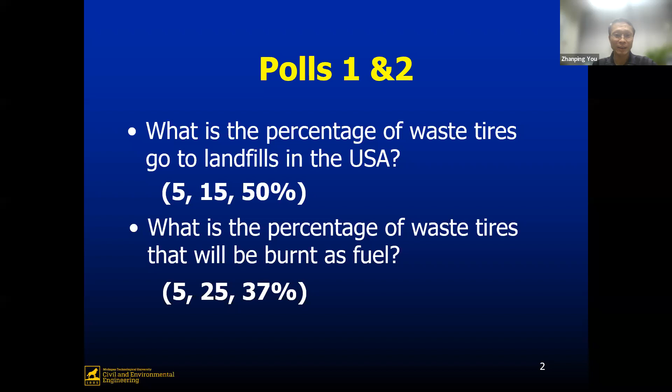Let's move to our second one, and I'm going to introduce what's the number in my mind. The next question is about waste tire as a fuel: what is the percentage of waste tires that get burned as fuel? The answer choices are 5%, 25%, and 37%. The poll is out, so feel free to pick one.

Sue should be launching a second poll if she has it. Meanwhile, you can think in your head what the answer is—what percent, this is all around the world. Wait, is this still in the USA? Yes, in USA, yeah, I did not write that one. Are you launching the poll, or is Sue? I think Sue is. Okay, it was up, but for some reason things did not work—let me try it again. Okay, sure.

I'm going to take my guess here. I'll guess 5%, because I hope people aren't burning tires. Oh, here we go, we get a chance to. So this was the first poll. Oh, the second one doesn't want to launch. All right, we're giving up on the second poll. Okay, you can basically take my guess. My guess is 5%. Well, I think it's bigger than 5%, but do you think we can go to about 37%? Really? Oh my gosh. I don't know, I ask.

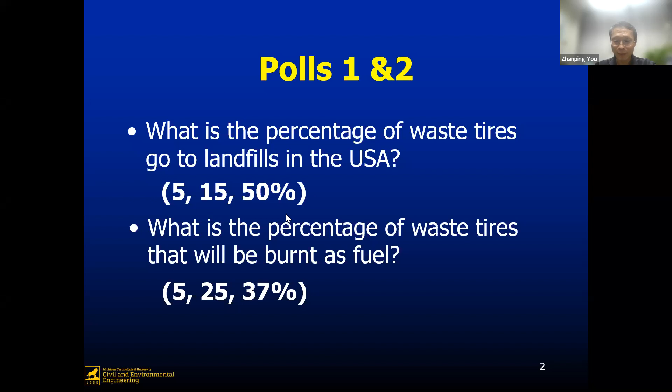Let's take a look, I have an official answer here. My answer comes from 2020 data from the U.S. Tire Manufacturers Association. On the left-hand side, these are all the tires we generate each year, about 4.5 million tons a year. You can see tire-derived fuel is about 37% — that's tires being burned as fuel.

Land disposed is about 15%. It's not like 50% because it's pretty much illegal to dump those things in the garbage, at least not in Houghton. You just cannot put it in the garbage — you have to pay, I think $5 a piece, so that you can recycle it. But my point here is land disposed and tire-derived fuel together, that's already 50%.

There are some other applications too, for example ground rubber, and in total about 4% of tire rubber is used in asphalt. It's very, very small — only about 4.2%. I'd like to see this number increase dramatically, even if not 40%, but much bigger, because that is more valuable in my opinion. So next, I'm going to show you why I think that way.

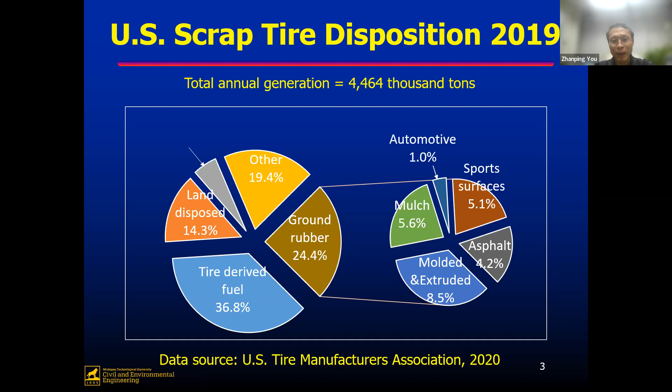Today I'm going to talk about using tire rubber to build roads. First I'll talk about field experiments and applications. Then we'll discuss some laboratory research work and modeling efforts. Then we'll cover education, workforce development, and some of the recognitions we received because of our projects, and briefly I'll provide some closing comments.

Next I'll talk about some typical road structures. Every different road has a different structure. Take US 41 in Baraga County — one of my projects is there. You have subgrade, on top subbase which is aggregates, then on top 6 inches of another type of aggregate, then 3 new layers of asphalt.

This project is basically what we call reconstruction, so everything is pretty new: asphalt base 3-inch, leveling asphalt 2-inch, and on top a 1.5-inch asphalt layer. That's the structure we have in US 41. But for other major highways with heavy traffic volume, the thickness is probably much thicker.

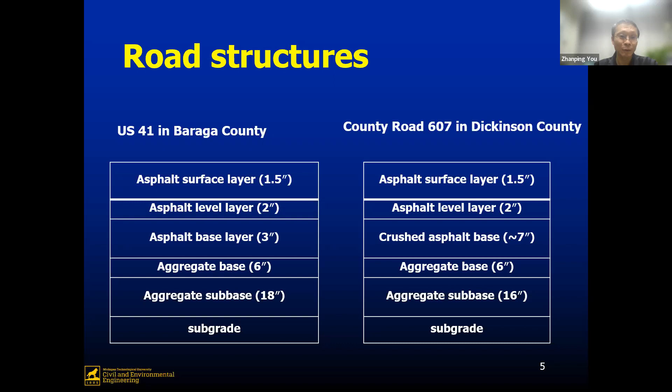That's because, price-wise, it's kind of expensive compared to other structures. The asphalt layer is the most expensive part. For a given project, the cost could be 70% of the materials cost or even more. That's basically the general information about typical road structures.

My next introduction will be how we recycle tires. Right now we get a lot of old tires. This is a facility I visited. On the left-hand side, you can see a fellow rolling those old tires and trying to shred them.

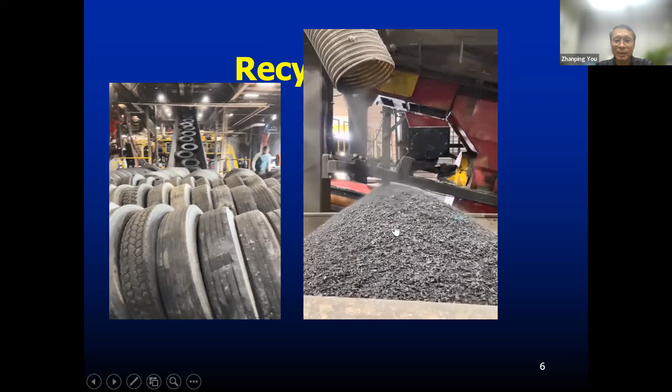Over here, they shred it into small pieces, and we process those pieces into finer materials to use. Eventually, this type of size is very coarse, as you can see here, and our material is even smaller. So the processing has a couple of stages.

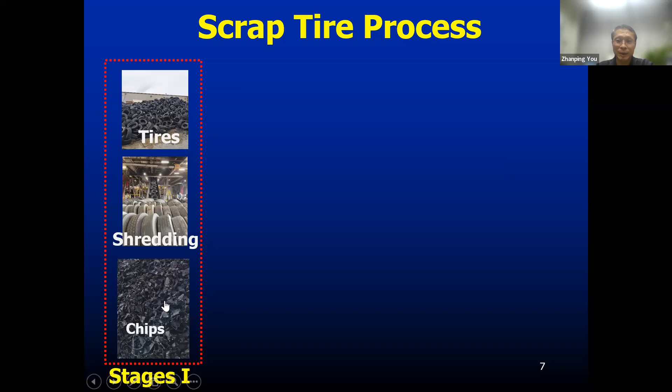First, the tire is shredded and becomes chips. Then we process it to get rid of the metals, because tires contain a lot of steel. We need to extract those metals because in asphalt road we don't want metals there—especially in Houghton, where we use a lot of salt. When salt reacts with steel, what happens? You get brown roads or something like that, which isn't really good.

So the next step we call stage 2. We granulate the chips again and again, and also remove the fibers, because there are a lot of nylon fibers inside. Those fibers aren't really compatible with the rubber—we don't really use the fiber, even though we have a research project recently starting to deal with those fibers. And then, of course, we get all those materials ready.

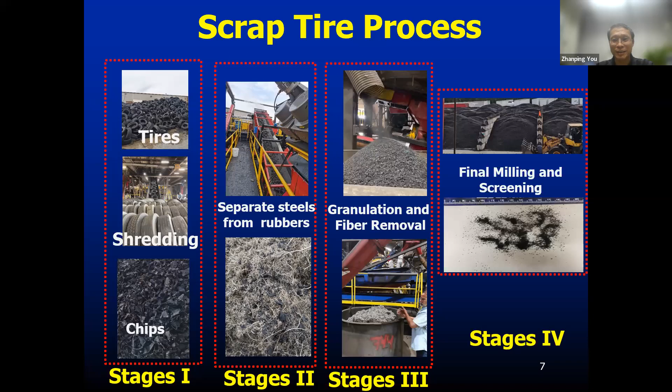You can see in the corner picture here, basically showing the fine particles. Those particles are normally around mesh 30 in size, and those are good for asphalt applications. So that's a quick introduction to how we recycle tires.

Next, we are going to put the rubber from tires into the roads. My first experiment was in 2015. We did some work at home—this is a road near us, only about 10 or 15 miles from campus. You can see this is in Keweenaw County.

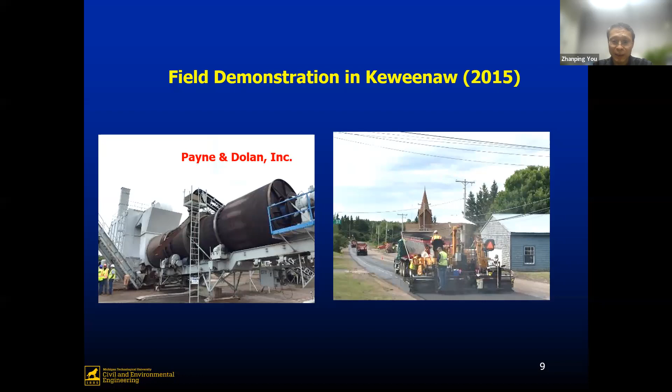The plant on the left-hand side is the Payne & Dolan plant in Hancock, and on the right-hand side is the road called Gay Mohawk Road, which connects with US 41. This road was taken as our experiment road, but it's a county road.

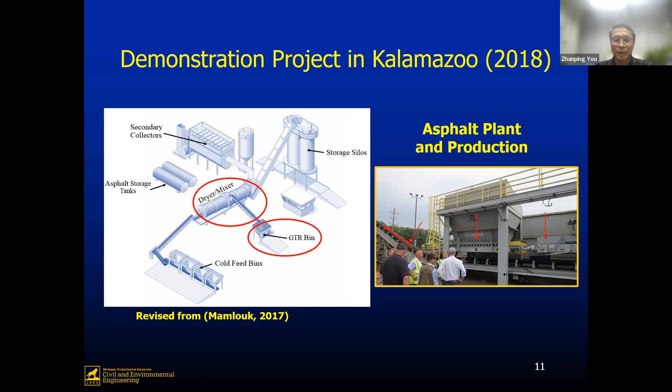All right, next one, I'm going to show you what the final product looks like. Here, basically, you can see this is the final product, being loaded up and then fed into a paver, and the paver is going to level it off.

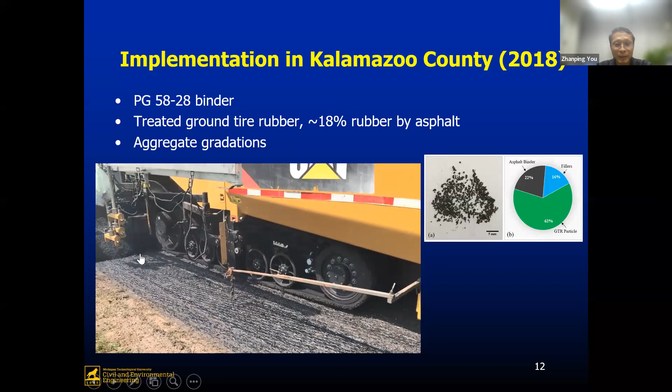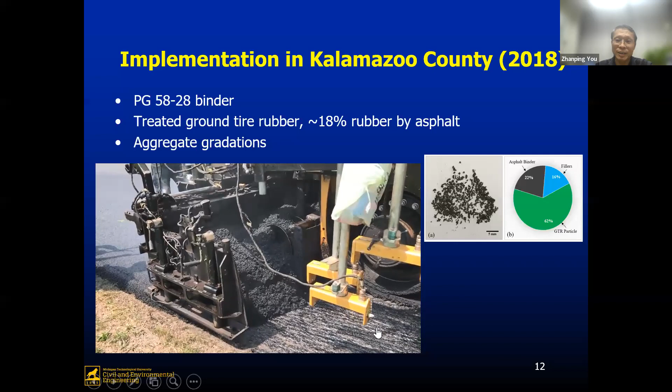Before that, of course, the road is being milled because we don't want to add more elevation. So basically, we want to put about 1.5 inch of asphalt surface. So we remove about 1.5 inch from the existing road because the existing road gets a lot of cracks, a lot of issues. We remove that section, we recycle those asphalt. Eventually, with the rubber, with new asphalt together, we come back to the roads.

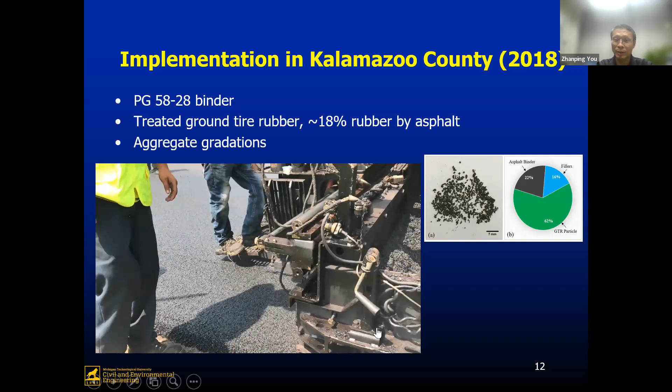So here is basically this asphalt. There's a lot of rubber inside. This is the highest rubber content we have played with in our research, about 18%. All right, so basically this is a lot. All right, let's move on.

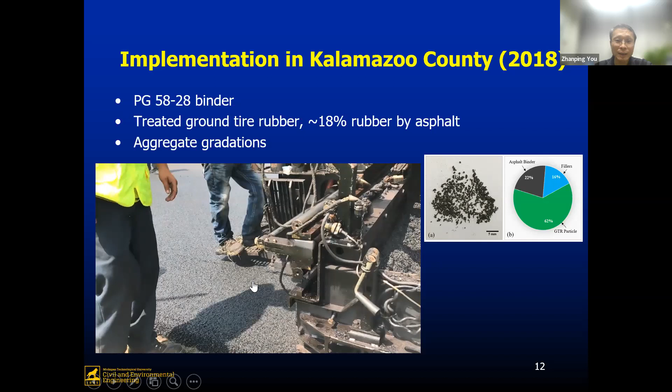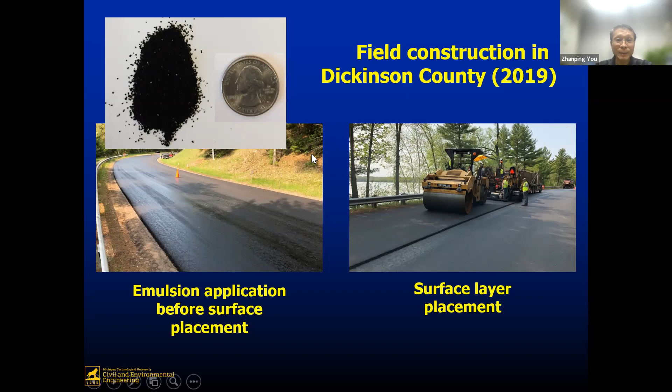And so basically the road is performing really well after 3 winters. So this is basically the project in Dickinson County.

I'm going to show you one exciting project that happened last year. This project is basically in Kent County near Grand Rapids. So basically this road, you can see this is a pre-existing condition. After we closed traffic, because this road is going to be repaired, we took this picture. You can see there are a lot of cracks and a lot of really, potholes also.

So this road, of course, has really heavy traffic. So basically what we did was use rubber asphalt. We only did basically this overlay, similar thing. We milled off about 2 inch on the top layer, and then we just paved another 2 inch back. Of course, compacted it, made sure things were going well, so the density is reaching the desired level we'd like to see.

So basically you can see this is 5 lanes, right? After the 5 lanes are done, you can see we have 3 lanes here basically with rubber asphalt. We also had 2 lanes for polymer sections, meaning polymer asphalt. Polymer asphalt in general is a material called SBS type polymer, which is more expensive than rubber. So in this project, we are trying to see if we can compare rubber versus polymer, if rubber materials can perform well with lower cost, so why not just promote use of more rubber instead of polymer? Normally we don't really use polymer unless it's really heavy traffic or special cases, because polymer asphalt is quite expensive.

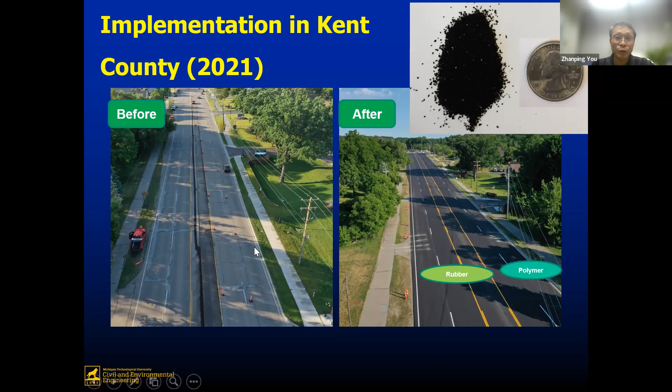All right, so I'm going to have one more poll here: what is the average daily traffic in the Kent County project I just showed you a minute ago? So basically for this one, what's the traffic volume? You can imagine, there are three choices. The first choice is 5,500 items of traffic per day, so that would be cars, trucks, everything. The second choice is about double that, 10,500. And then the third choice is 16,500.

And looks like people are choosing B, which is 10,500. Of course, we have no idea really.

There were two lanes of traffic. Or you're counting both ways, right? Like that has to be all the ways. About out and back? Yes. Okay, because that's basically applied on the same road. True, it's once out on one road and once back on the other road. Yeah, the 5 lanes, the outer 2 lanes are used often, the center lane normally for turning.

All right, looks like the majority, 61%, believe the answer is 10,500. Well, really my answer here is basically what we counted, and also according to the prediction, and of course the county did a really good job. They counted 16,500. So amazing, it's really a high traffic area. That's the reason we spent quite some effort and did a lot of testing on this road before we placed the material. We spent quite some time observing the materials design, and spent quite some time during the construction, and a lot of testing post-construction. So the really high traffic volume, 16,500, and there's a pretty significant amount of truck traffic, because this road basically goes to the interstate highways.

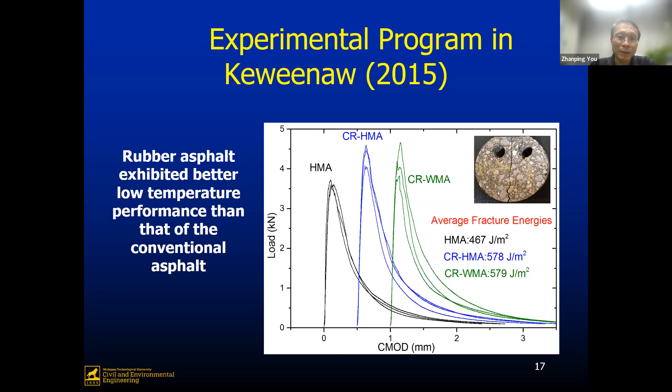The more fascinating thing is my next picture. This is a project in Kalamazoo County. Remember, this one had 18% rubber in the asphalt, which is really high concentration. The green colors are the fracture energy for our designs.

The first two bars are conventional asphalt. The conventional asphalt, for example, the fracture energy is only about 400.

But in our new design, we average about 1,200 or so. So basically, we can easily make that about 3 times higher than the conventional asphalt.

So this is really good. This means the material is going to be really tough, basically anti-crack. So I don't expect too much fatigue cracking, or maybe low temperature cracking.

So that was at about room temperature, right? No, this is minus 24 degrees. Sorry for that, minus 24. That's impressive. Yeah, because low temperature cracking basically happens in really freezing temperatures.

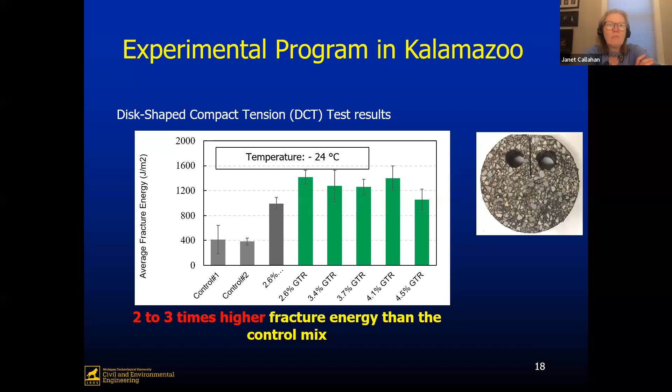In summertime, for example, you really don't see much cracking, but in wintertime it happens very often. That's the reason we test at really freezing temperatures. Very good question. Yeah, this is minus.

Another type of application we did with rubber is called chip seal. My very first chip seal attempt was in 2018. You can see in Kalamazoo here we have a special distributor truck. This distributor truck has the heating element and agitation inside.

Normally you just have emulsions, but for our research we have hot asphalt here. We have rubber being introduced through the auger to this truck, with a certain amount—as I mentioned, it was a really high percentage.

Then we blend it, agitate with high temperature, so that the asphalt and the rubber can work together and make a really uniform structure.

With that, we distributed that hot asphalt to the road, which you can see here on the left-hand side—that's after the distribution of asphalt. Normally for this one, we use about a half gallon per square yard. That's pretty significant.

So with that much asphalt and with a lot of rubber inside, on top we apply chips, which are small stones, and compact it. That's basically how you make a new road. This road, of course, is low cost, but potentially can have very good longevity because of the rubber application.

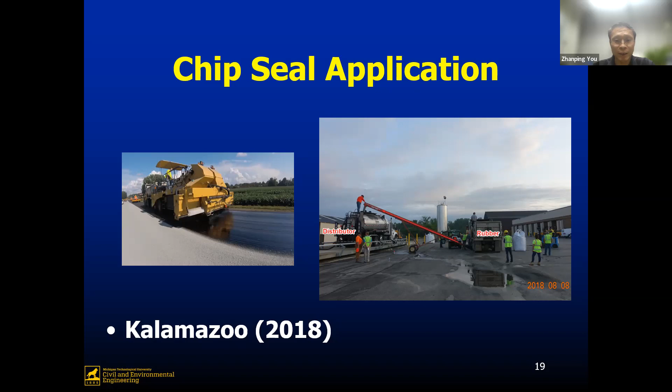Next I'll show you that last year we did a different chip seal process. This chip seal also uses hot rubber, but we are not introducing it to this truck.

You see this truck—the asphalt liquid is coming from the plant. We basically produce this in the plant.

You can see on the corner here, this is a yard. We process the rubber, and the rubber meets with asphalt, then we let it cure, and then put that in the distributor truck and send it to the road.

So this is how they spray hot asphalt on the road—about more than half a gallon per square yard is applied.

You can see the existing road condition is pretty bad, a lot of cracks. But this is basically how we are doing this type of project.

And you can see this one actually is not smoke. All right, this is not smoke. You don't really smell too much, really. This is really steam because the road structure is kind of cooler, and the asphalt that comes out is pretty hot. So when they meet together, it generates a lot of water vapor.

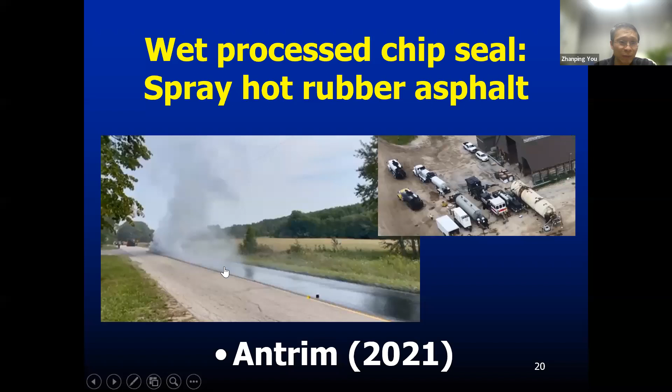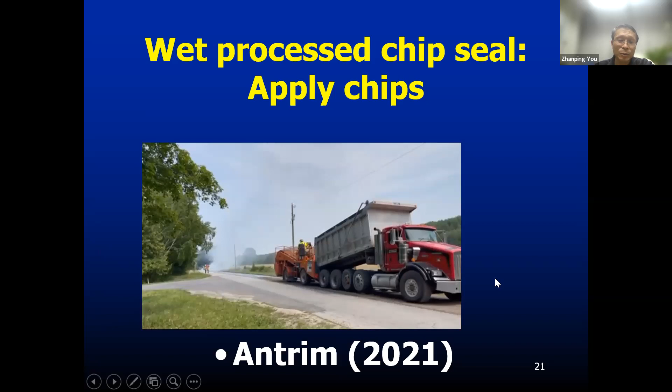My next slide is basically showing you after the spraying, right? So this is the hot rubber being applied on roads. We are applying chips on top, and after the chips are ready, we compact it to make a new road. So as I said, this is really a low cost way to maintain an existing road.

I'm going to briefly talk about some of the models we have, because I know most of the time you'd like to see what the university is doing, like doing the lab work. Of course, we always do lab work, and we also like to see applications. Sometimes computer models are something very unique, and there's a lot of insight we can get.

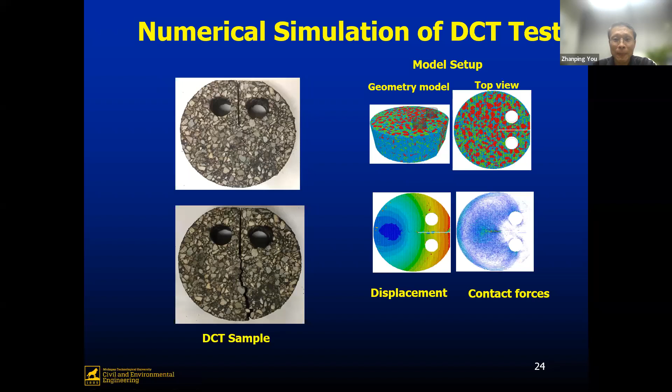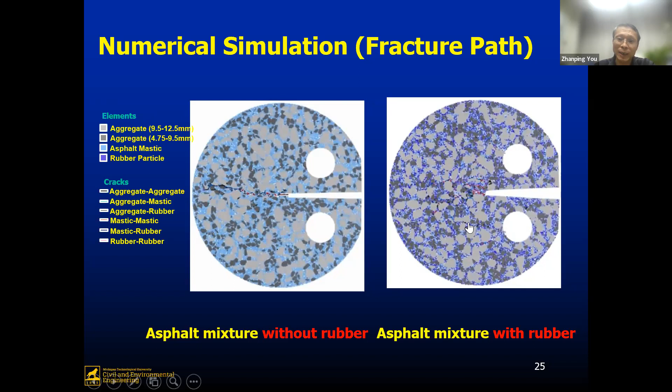I'm going to show you, for example, on the picture here, one sample has rubber, the other no rubber. With no rubber, the asphalt sample can only go through a certain amount of displacement before it cracks quickly. On the right hand side, you can see the red color things moving forward - those are cracks. This sample allows much more displacement until it's cracked, basically the failure. So that means there are some unique advantages when asphalt is introduced with some rubber. The one on the right is the better one to use with rubber.

So I'm going to show you the next picture, which shows the contact force chains. I'm going to click this one - you can see during the simulation, I took it out because all the images gathered together are kind of hard to read, so I only separated all the contact force chains to show.

You can see this one - remember the crack really happening, and the contact force continues to move towards the left, so it cracks the sample really quickly, concentrating the force. But on the right hand side, because of the rubber, you can see the force has been redistributed to different locations, which means the sample will survive much better. So that's the difference between even the same structure, exact same structure - the only difference here is the introduction of new rubber materials inside.

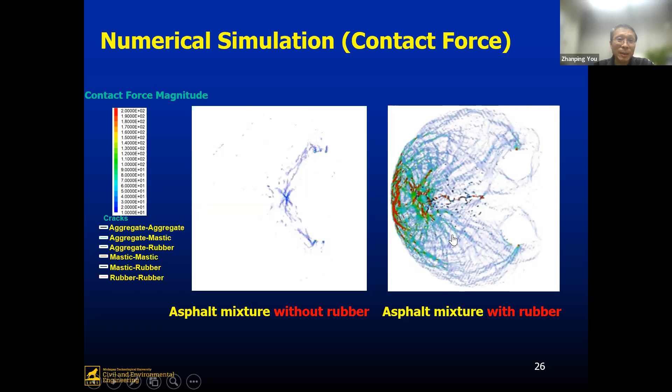I'm going to introduce my assistant Kobe. Kobe has been here with me over two years, and he has helped me do quite a bit of research projects. So Kobe, are you ready?

Yes, I'm ready. Hello everyone, I'm Kobe. I'd like to introduce some field performance testing work from the past two years.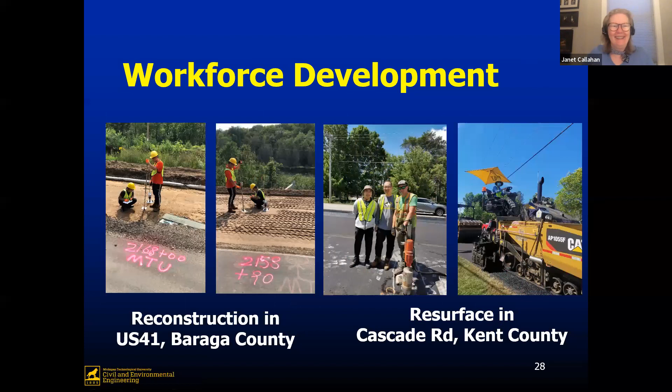Let me continue. We have also trained lots of undergraduate and graduate students in our labs. This only shows the research assistants in our lab in the past two years, and we really appreciate their contribution to our lab and our research. We also welcome more future engineers to join us and do more research work.

Great, thank you very much, Kobe. These are just some of the assistants we have pictures for, we have a lot more but don't have their pictures, so we couldn't put them here. I might have another poll now.

What is the percentage of asphalt in asphalt concrete materials? You see the top layer of asphalt, that's the black color. I want to know what percentage you think there is. The options are 20%, 5%, and 50%. Looks like a lot of people right now are picking 20%.

Well, what's the rest of it? There's asphalt binder, there's small rocks in there, and there are plenty of rocks, plus rubber from your tires. Yeah, tire rubber is a very small percentage.

For example, for the project we did in Kalamazoo County, we had 18% rubber in the asphalt. That means if the asphalt were, say, 10%, then 18% of that is 1.8% of the entire asphalt mixture, because the mixture has a lot of stones. For most asphalt mixtures, roughly 95% by weight are stones.

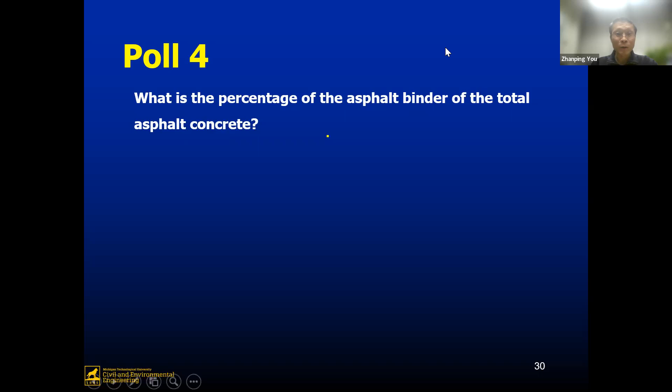All right, I'm going to move on. So far we've talked about an overview of field experiments, showing some work we did in Keweenaw County, Kent County, and Dickinson County. There are some other projects I didn't show, but we covered some of them, including one test we did in our laboratory, which is the cracking testing.

We also do quite a bit of computer modeling work, showing the fundamental properties of materials. Kobe talked about our workforce development and education. I'm going to briefly talk about some of the recognitions we have. This is a project we did in Dickinson County, and after that we won an award from the County Road Association of Michigan.

This project, of course, we partnered with Dickinson County Road Commission and also their biking association and a few others. So EGLE is our major sponsor. We had this road really opened, and it's had a pretty good impact.

In the project we did in 2018, you can see we had a lot of partners joined together to work on this project: contractors, material suppliers, Michigan Tech students and researchers, and of course road agencies and road commissions from Kalamazoo County, and also support from EGLE.